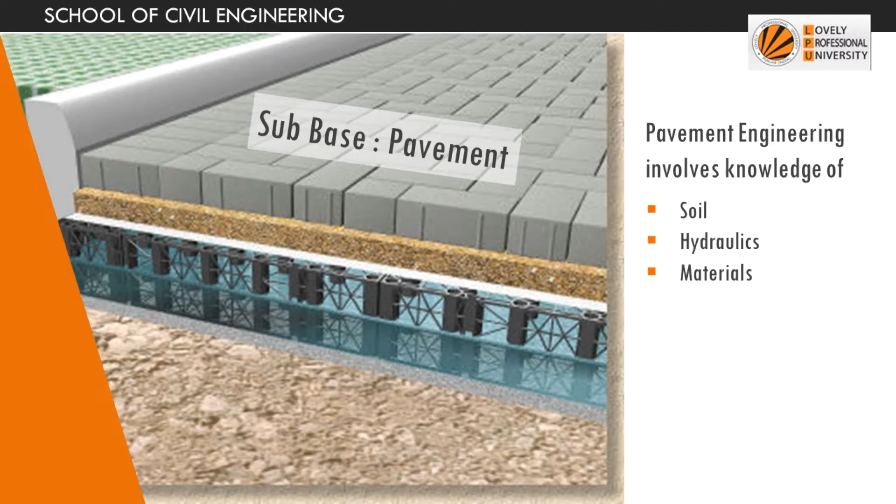Material behavior and response under action of load, weight, and other weathering action is also critical in pavement engineering for better service life and serviceability. The material should be tested and the quality control should be ensured during the entire manufacturing and laying process. In this series, we will take you to each aspect of the pavement.

Look around yourself, you will find various engineering marvels. But as a civil engineer, you should understand what lies inside this structure. Today, as a civil engineer, we will discuss a very important element of construction, that is pavement engineering. And in this, we will take you deep into the life cycle of a pavement, how pavement is made from the raw materials to the execution, to how it is tested, and ultimately you will get a durable and sustainable pavement for a service life that is guaranteed by an engineer.

So in practice, there are two types of paver blocks that are available in market. First one is the concrete paving blocks or the paver blocks. The second one is the clay paver or the clay paving blocks. They both are prefabricated as per the requirement of client or the site. And these are very easy to lay, don't require any complicated machinery to arrange it.

The advantages of paver blocks. Paver blocks are prefabricated into customized shape and size to suit the requirements of the site. Paver blocks are easy to lay and do not require any special equipment for laying. Paver blocks do not require any special maintenance as compared to concrete or asphalt surface. A simple washing can help the blocks to be clean and bright.

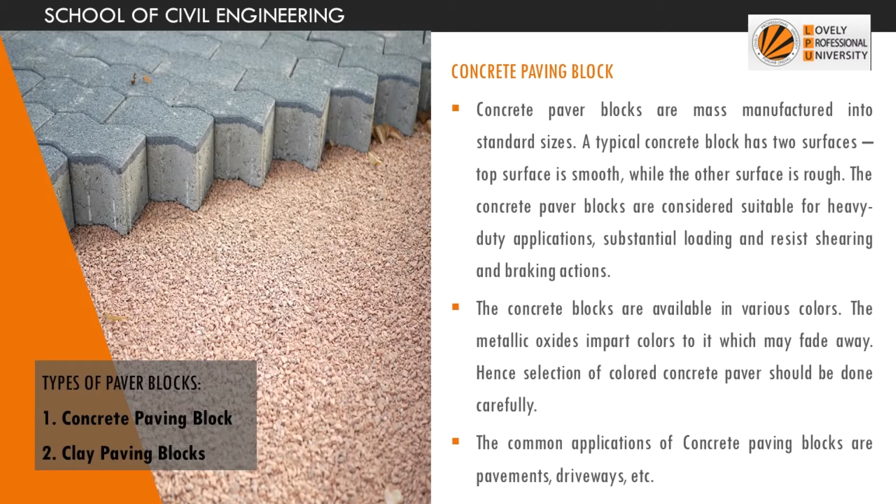The concrete blocks are available in various colors. These colors are mainly due to the metallic oxides of the ingredients, which may fade in due course of time. Hence, the selection of colored concrete paver should be done carefully. The common application of concrete paving blocks are pavements, driveways, etc.

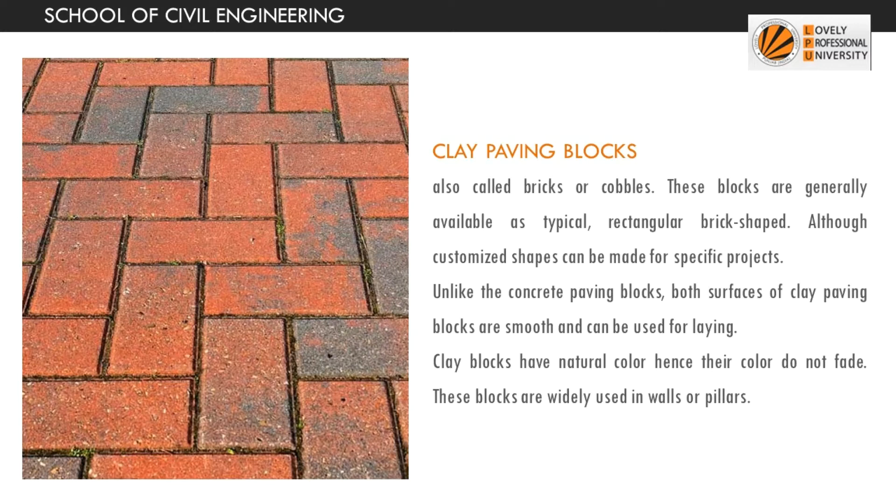The clay paving blocks, also called bricks or cobbles, are generally available as typical rectangular brick shaped, although customized shapes can also be made for some specific projects. Unlike the concrete blocks, both the surfaces of the clay paving blocks are smooth and can be used for laying. Clay blocks have natural colors, hence their color does not fade. These blocks are widely used in walls or pillars.

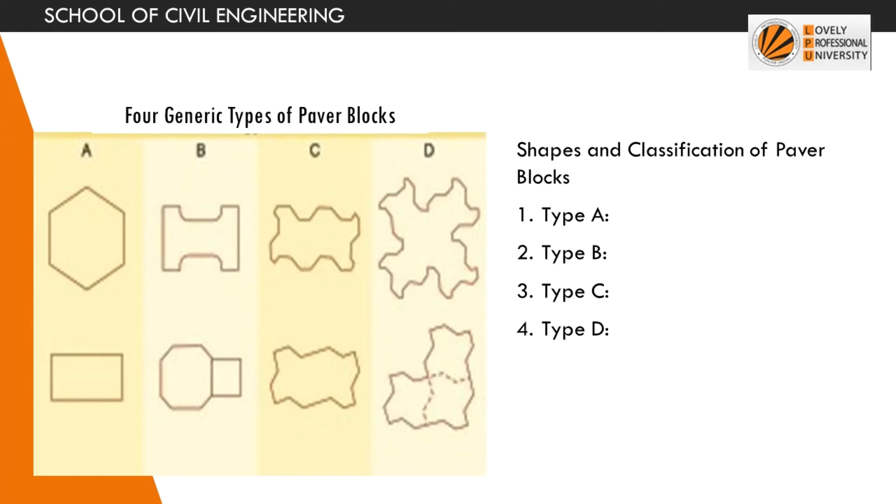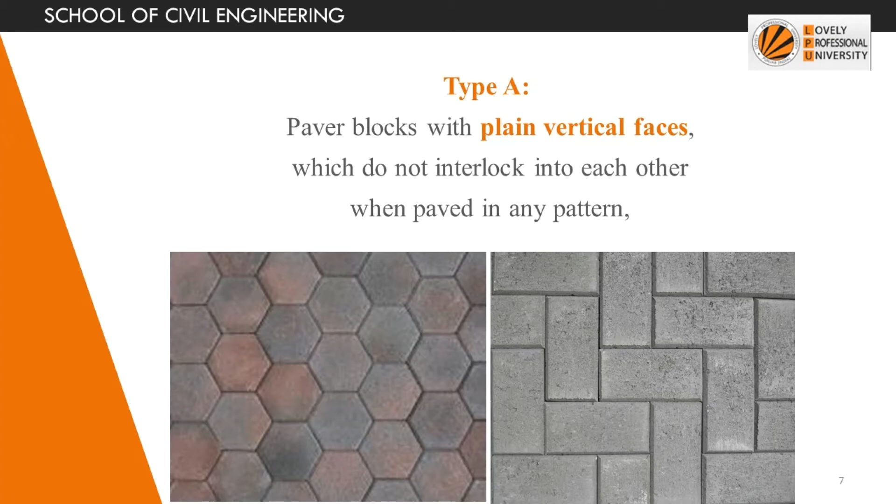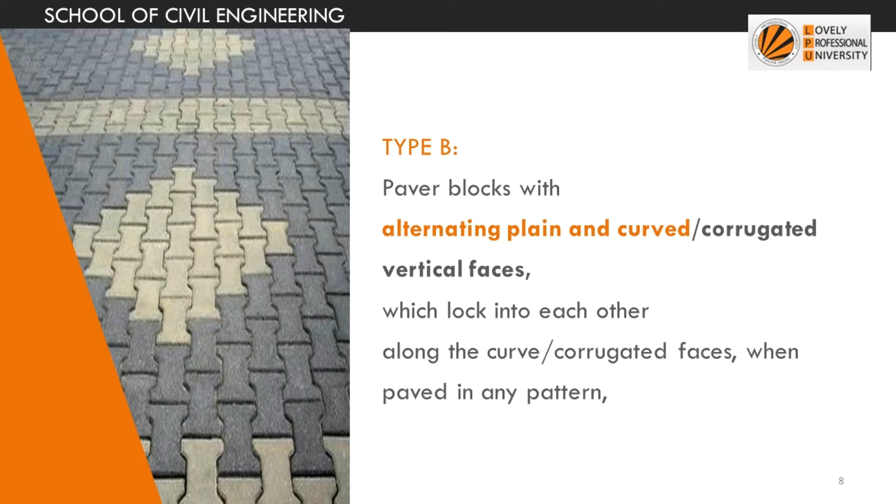Concrete pavers are classified into four categories, that is Class A, Class B, Class C and Class D. Shapes and classification of paver blocks. There are four generic shapes of paver blocks corresponding to the four types of blocks. Type A, paver blocks which have plain vertical faces which do not interlock into each other when paved in any pattern. Type B, paver blocks with alternating plain and curved corrugated vertical faces which lock into each other along the curved and corrugated faces when paved in any pattern.

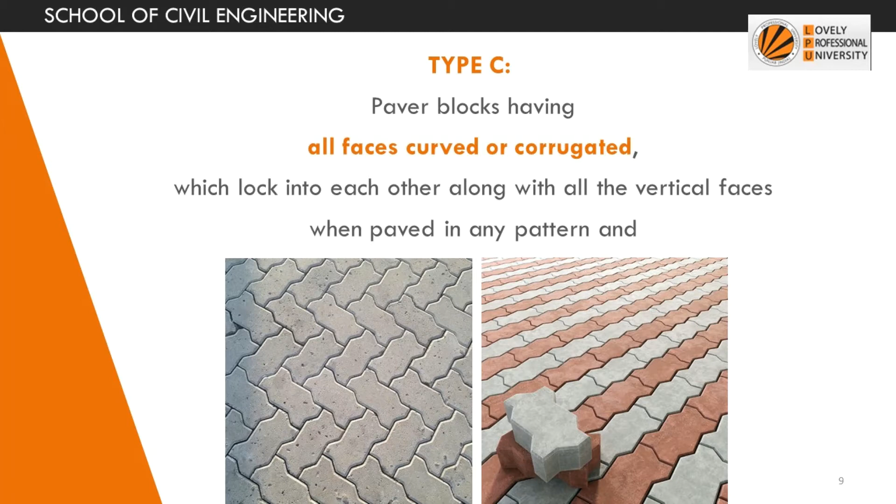Type C, paver blocks having all faces curved or corrugated which lock into each other along all vertical faces when paved in any pattern. Type D, L and X shaped paver blocks that have all faces curved or corrugated and which lock into each other along all the vertical faces when paved in any pattern.

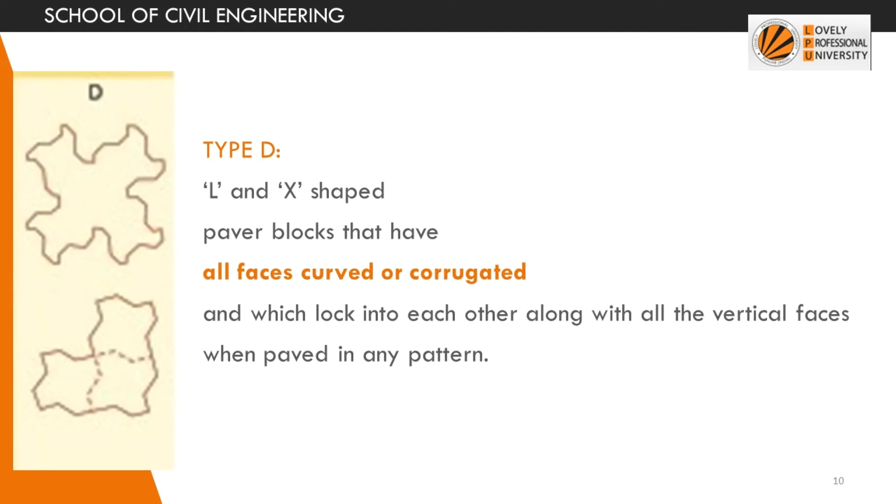Paver blocks are very durable and they are very resistant to the weathering action that takes place in the atmosphere. It has to be assured that they are good at sustaining the loads of vehicles and the materials that are moving on them. To ensure that, you need good testing and material quality check. Paver blocks are available in various vibrant colors, so it makes it a versatile material that can be used for residential as well as commercial purposes.

That's all for this video, but in the next video we will take you to the industry where you can see the birth and the product making of the paver blocks. We'll start from the raw materials and we'll end up with the finished product. So see you in the industry.